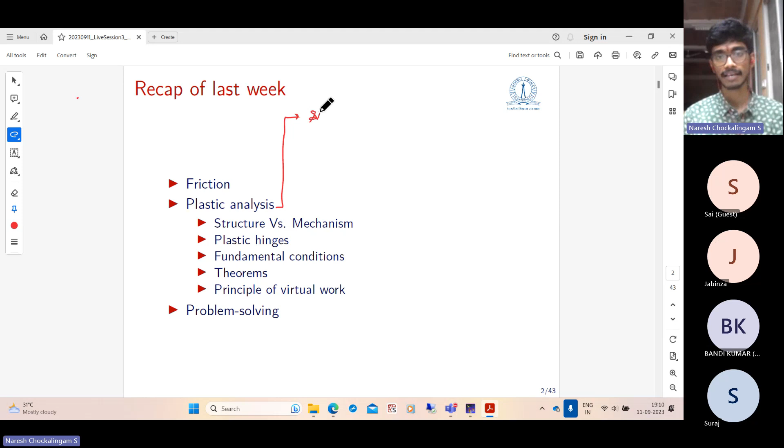Then we looked at plastic analysis of structures. What is the need for plastic analysis of structures? We saw that there is always reserve strength beyond the yield limit. Structures have strength beyond yield after yielding, and this also simplifies the analysis of indeterminate structures. There are various concepts involved in plastic analysis.

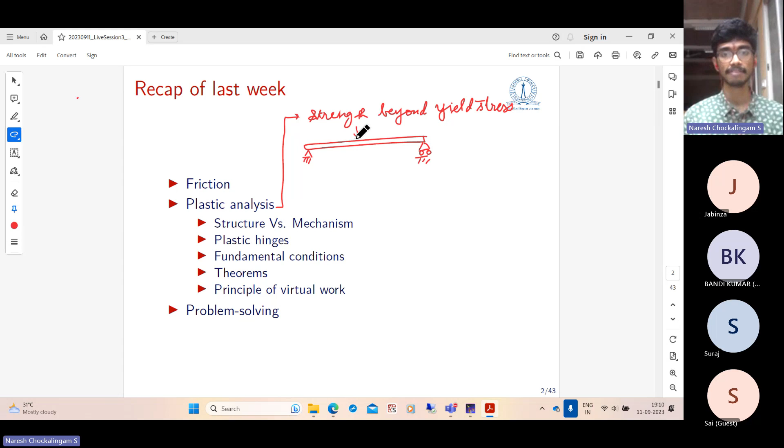We saw that if we take a beam, subject it to some loading—let's assume a mid-span concentrated force—and keep increasing the load P from 0 to a certain limit until the beam collapses, then as the load is increased, initially there is a linear elastic response. Suppose this beam has a rectangular cross section. At a certain load, let us call it P yield, Py.

At this load, the force is so high that while the stress in the cross section remains linear, the extreme fibers have reached the yield stress of the material. Beyond that point, the load can further be increased, but the stress in the extreme fibers cannot exceed Fy. So the fibers next to them start reaching the stress Fy, and the stress distribution in the beam cross section is no longer linear.

You get a bilinear stress distribution: up to a certain limit, part of the section has yielded and the remaining part remains linearly elastic. At this stage, the stiffness of the beam comes only from the linear elastic portion, since the yielded fibers have no stiffness. The material curve of an elastic, perfectly plastic material shows a linear elastic response followed by a perfectly plastic response, where stiffness is zero. So these regions of the beam do not contribute to elastic stiffness, and the stiffness of the beam is reduced significantly, making the curve nonlinear.

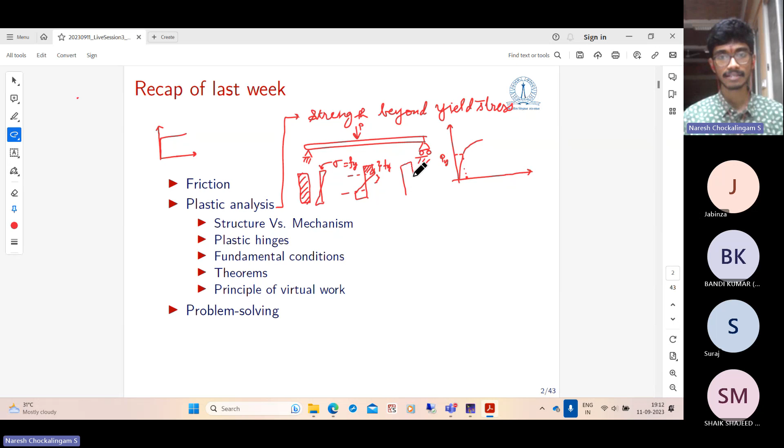As the load is increased further, the plastically strained region increases until it reaches the neutral axis. At this point, the entire cross section is plastic—no longer elastic—and the cross section is completely yielded, with no stiffness. Therefore, the beam collapses.

For this simply supported beam, the load at which the middle cross section becomes completely plastic is called the plastic collapse load, because once fully plastic, it supports a moment given by a constant stress above and below the neutral axis. If you take an infinitesimal element and integrate the force due to this, multiplied by the distance, you get some moment.

The moment at which this happens is called the plastic moment capacity of the beam, MP. Once the plastic moment capacity of the beam has been reached, it has got no more stiffness, so it forms what is called a plastic hinge. It is free to rotate, but at a constant moment of MP.

We have seen this in the last week. If you haven't attended, you can go look at the YouTube link of the previous lectures. So this is the mechanism by which a beam collapses.

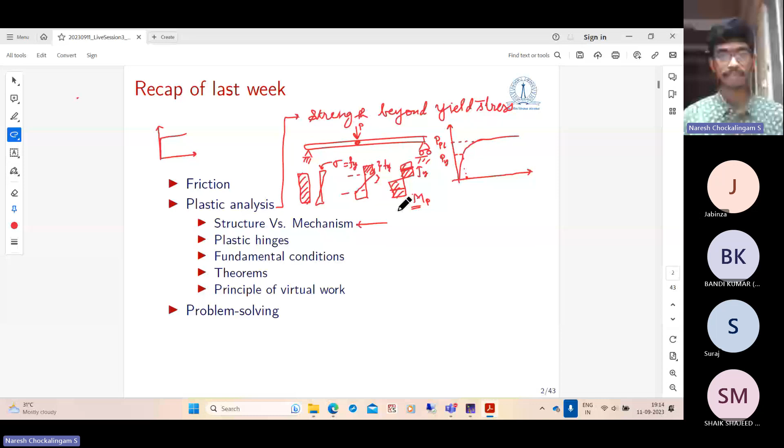We saw that if we have a truss structure like this, subjected to some force, it resists the applied load by generating internal forces arising from the deformation. On the other hand, if you remove the middle member...

And you have something like this, both pin connected, all joints pin connected, and you apply a load like this, it collapses this way. It forms a 4-bar mechanism. Here the members don't deform, they don't generate any internal forces. They accelerate, they just rigidly rotate and translate, and they cannot take any load.

So at the verge of collapse, what happens is there are sufficient number of plastic hinges formed and the structure becomes a mechanism, or is close to becoming one. So a structure cannot take any further increase in the applied load. That is the point we call the collapse load.

So we have seen what plastic hinges are, and we saw what are the 3 fundamental conditions that need to be satisfied by a structure at the point of collapse. When a structure is at the verge of collapse, the first condition is it becomes a mechanism.

There are sufficiently many plastic hinges formed such that it becomes a mechanism. The second condition is it is still in equilibrium with the applied loads, so the internal forces in the structure are in equilibrium with the applied external forces and the reactions.

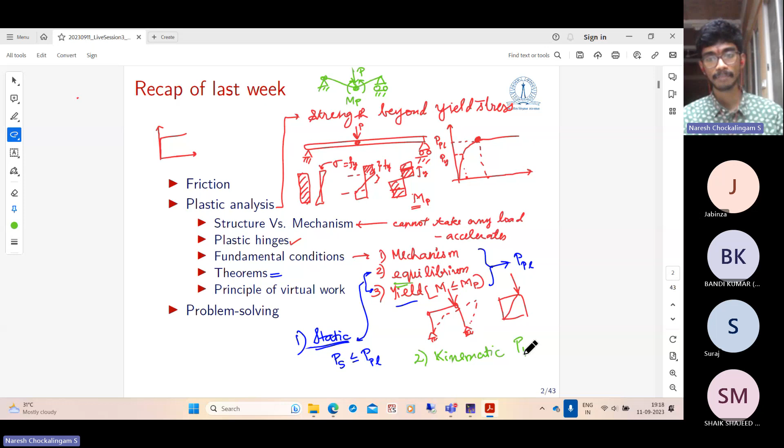Once it has formed a mechanism, the moment in the plastic hinge is equal to MP. So we assume such a mechanism has already formed and enforce equilibrium to determine the force at which the mechanism forms. That gives an estimate of the plastic collapse load called P kinematic, and P kinematic is always an upper bound to the true plastic collapse load PPL.

The third one is if all three conditions are satisfied. In the first case we satisfy conditions 2 and 3. In the kinematic approach, we satisfy conditions 1 and 2. In the third case we satisfy all three. So satisfying 1 and 2 gives an upper bound, satisfying 2 and 3 gives a lower bound, and satisfying all three gives exactly the plastic collapse load.

And for solving problems we saw the concept of the principle of virtual work. Don't worry too much about this. Problem solving is actually easy in plastic analysis. The concepts are a bit involved, but don't worry about the theorems — it will be very easy while we solve problems.

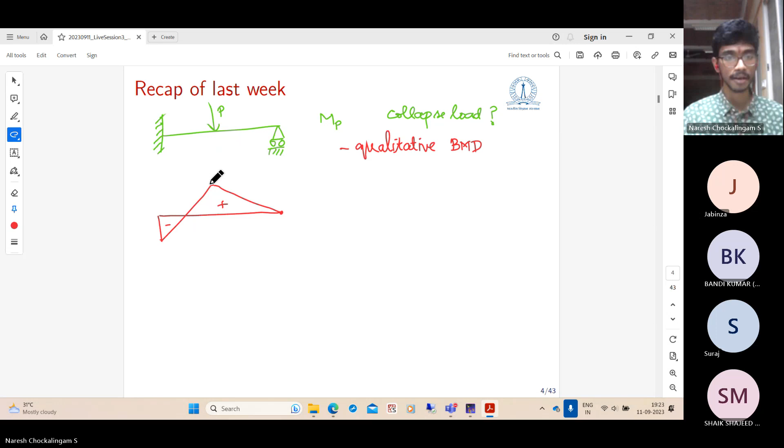We don't know whether this value is higher or this value is higher, or what those values are, but we know a maximum bending moment can either occur here or here. So we have drawn the qualitative bending moment diagram - that is the first step, to draw the qualitative bending moment diagram, which we have done.

The second step is to mark plastic hinges at the absolute maximum of the bending moment diagram. As I said, the moment is always highest here or here in the elastic range. So as we increase the load, the maximum stresses will be reached at this section or this section, and once the stresses increase so much that the entire cross section becomes plastic, it forms a plastic hinge. So it is most likely to form plastic hinges either here or here.

So these are the two locations. Why not anywhere else? Because if it had to form a plastic hinge anywhere else, it should have already formed a plastic hinge here, since the stresses are higher here than anywhere else in the beam. So the stresses are higher in these two locations compared to anywhere else in the beam.

So the first plastic hinge will be formed here, and once it forms a mechanism, it cannot increase the stress beyond that point. So once it forms a mechanism, the structure will just collapse. That is the idea - once plastic hinges are formed such that it forms a mechanism, the stress cannot increase any further in the structure because it has started accelerating and will not generate any internal force.

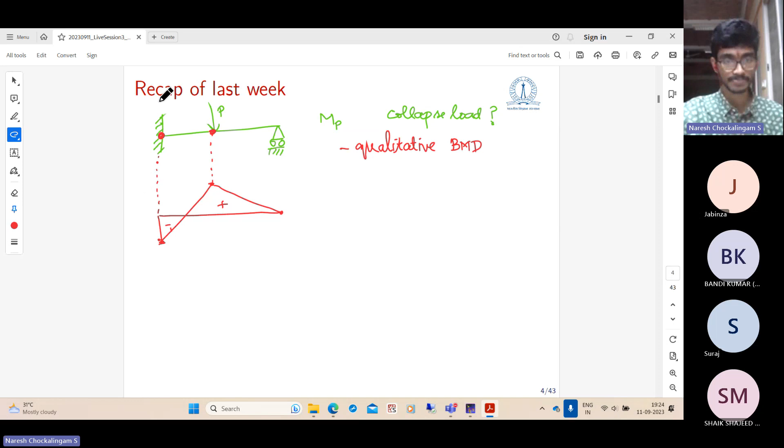So the second step is also done - mark the plastic hinges at the absolute maxima. Now, how many mechanisms are possible? If you have attended the last class, you will know that the number of mechanisms - suppose n is the number of possible mechanisms.

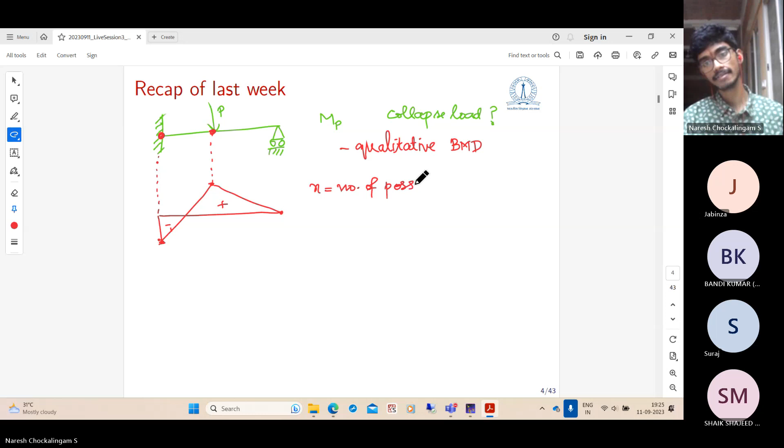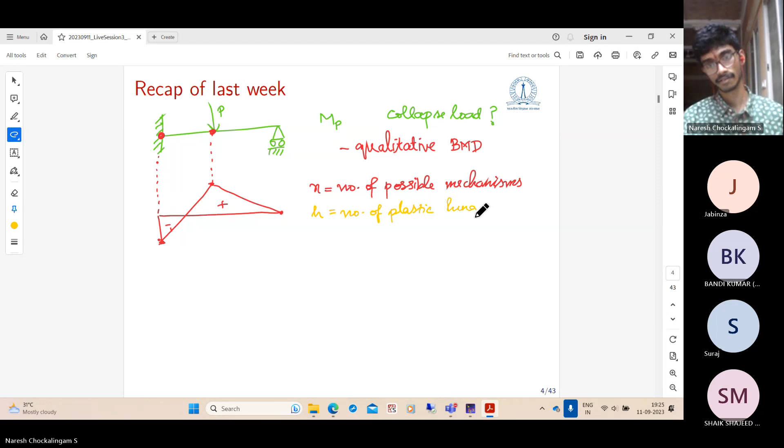It is related to the number of plastic hinges, suppose H is the number of plastic hinges, or actually the number of independent mechanisms. I'll say why it is important. And suppose S is the degree of static indeterminacy. Then these three are related by the formula.

Why is that so? For example, it is easy to see in this example, for this to form a mechanism, you need only one plastic hinge to be formed. The mechanism is like this: once this section becomes fully yielded, it cannot resist any moment and it forms a plastic hinge like this. It cannot take any force.

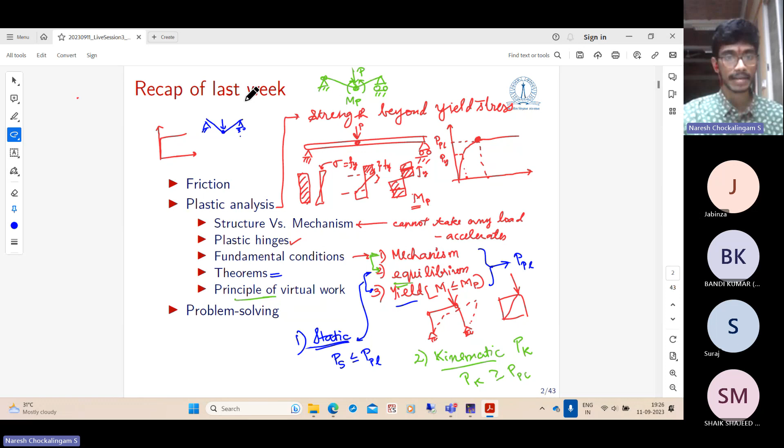But here, is it enough to form a plastic hinge in the middle? No, because even if it forms a plastic hinge in the middle, it is not going to accelerate. This is still attached, so this will flex as a cantilever beam and carry some load. So this is not enough - this is still a statically determinate structure. So one more internal hinge has to be introduced to make it a mechanism. If that hinge happens anywhere here, then it forms a mechanism.

So you know that the statically determinate member has exactly the number of forces which are needed to keep it stable. And if you remove one of the member forces, then it becomes unstable. That is exactly what we want - we want it to become a mechanism. So the number of mechanisms possible is the number of hinges required minus the static indeterminacy. Or the number of hinges required is nothing but the number of mechanisms plus the static indeterminacy. So the number of independent mechanisms is H minus S.

In this case, what is the mechanism? We have identified two plastic hinges. So at the verge of collapse, the structure will go to some shape like this.

And once it forms a mechanism, what is the moment at these plastic hinges? It is the moment capacity. Here we have a hogging moment, so I'm marking it in the same direction - it is MP. Here we have a sagging moment, so I'm marking it in this direction, which is also MP.

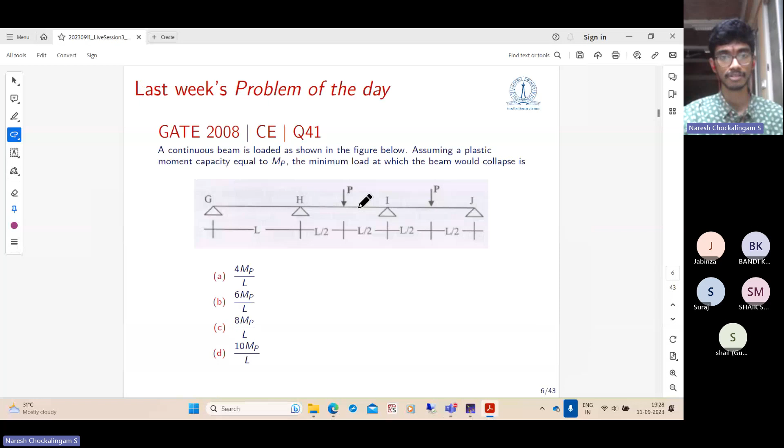For this, how do we obtain this - how do we obtain the plastic collapse load, the relationship between the load at collapse and the plastic moment capacity? We have two methods: one is the principle of virtual work, which we discussed last time, or the equilibrium of parts. I didn't discuss this last time because the principle of virtual work is much easier and takes less time than equilibrium of parts.

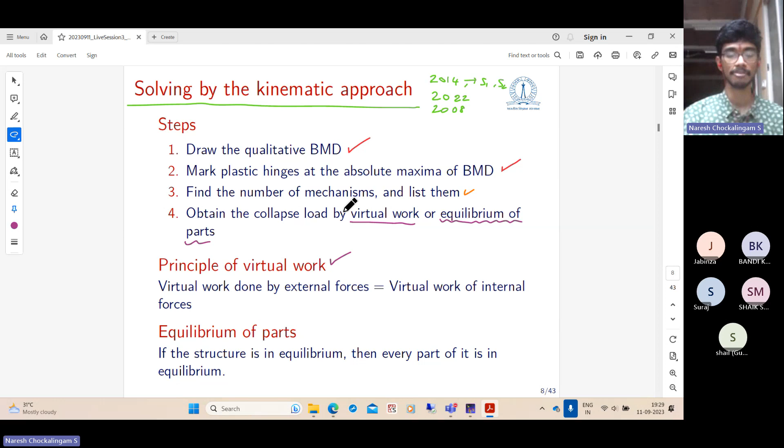So for this problem, this is the deformed shape. At the verge of collapse, this is how the structure will look like. And what does the principle of virtual work state? It states that the work done by the internal forces is equal to the work done by the external forces in moving through any admissible virtual displacement.

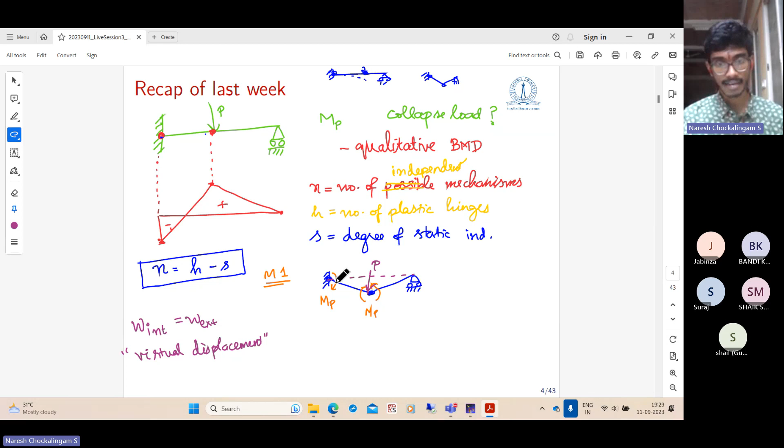So in this case, this is the structure at the verge of collapse. Suppose this beam has rotated by some theta at mid-span. So this is an isosceles triangle, so this will also be theta. And using the exterior angle theorem, this will be theta plus theta - so this will be 2 theta.

Now, if you see the external work done, suppose the midspan comes down by a distance delta. What is the work done by the external force P? It is P into delta. And in this case, delta is equal to theta times L by 2. So it is P theta L by 2.

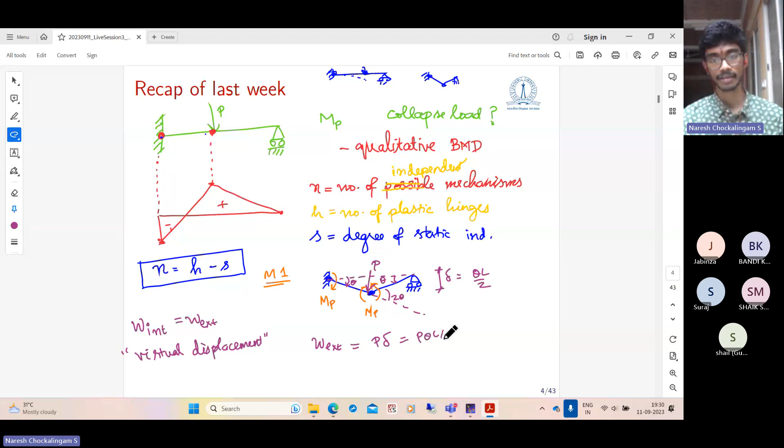And what is the internal work done? Internal work done is: you have an internal moment MP which is rotating this beam through an angle theta, so that is MP into theta, plus here you have a moment MP which is rotating this segment of the beam.

Suppose there had been no plastic hinge, this beam segment would have been straight. The straight beam had to rotate by 2 theta to make it to the current shape. So if the plastic hinge has formed and the structure is collapsing, and it rotates this way, this end by theta, and the midspan comes down by delta, then this segment of the beam has undergone a rotation of 2 theta.

So this plastic hinge has done work equal to MP times 2 theta, which is nothing but 3 MP theta. Equating both, you get P is equal to 6 MP by L. So this was the problem that we solved in the last session.

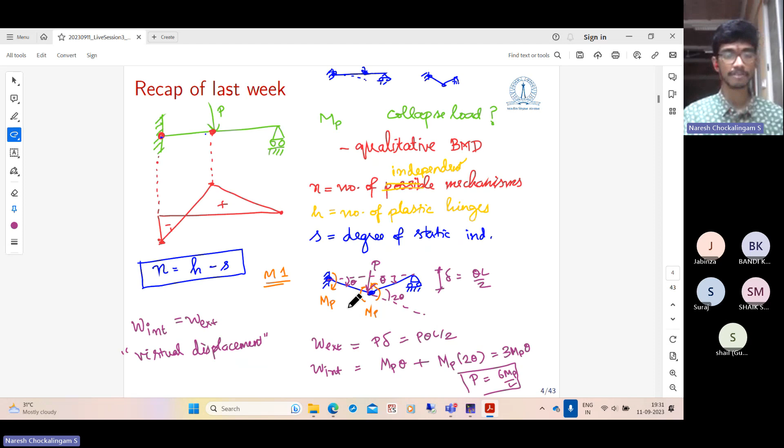So this is using the principle of virtual work, but instead you can also use the equilibrium of parts. I'll demonstrate it in today's problem. This is a problem that appeared in GATE 2014 second set.

In this case, we have an overhanging beam of one span L and the other span L by 3. On this span, there is a midspan concentrated force of magnitude P. Here you have an end span concentrated force of magnitude P by 2.

Let us go step by step. What is the qualitative bending moment diagram of this? At this end, you will have zero moment because it is a free end.

Right above the intermediate support, you will have a hogging moment because this force is acting downwards. So you'll have a hogging moment right here. And right below this, there will be an upward reaction. Right below the concentrated force, you'll have a sagging moment. And this end is hinged, so you will have zero moment there. So this is the qualitative bending moment diagram of this beam.

So the plastic hinge on this beam can either happen here or here. It cannot happen anywhere else, because before that, the structure would have collapsed. So plastic hinge can form here or here.

Let us draw the deformed shape at the verge of collapse. The structure will look something like this. So before that, let me put only the supports.

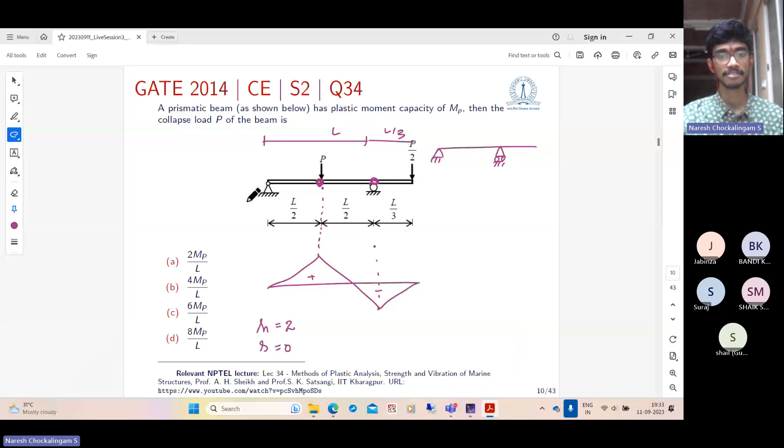Now, how many plastic hinges are there? There are two possible locations of plastic hinges. What is the degree of static indeterminacy of the structure? It is statically determinate, right? So the static indeterminacy of the structure is 0.

You can see because you have three equilibrium equations and you have three unknown reactions, 1, 2, and 3. So it's statically determinate, meaning the static indeterminacy is 0.

And what is the number of mechanisms possible? It is H minus S. There are two possible mechanisms. In one case, the plastic hinge is formed here, and in the other case, the plastic hinge can be formed here. So this is mechanism 1, and this is mechanism 2.

So how does the beam deform in mechanism 1? This portion remains straight, and this is how it deforms. In mechanism 2, this is how it deforms. Let me indicate the applied forces: here we have an applied force of magnitude P, and here P by 2. Same in this case too, P and P by 2.

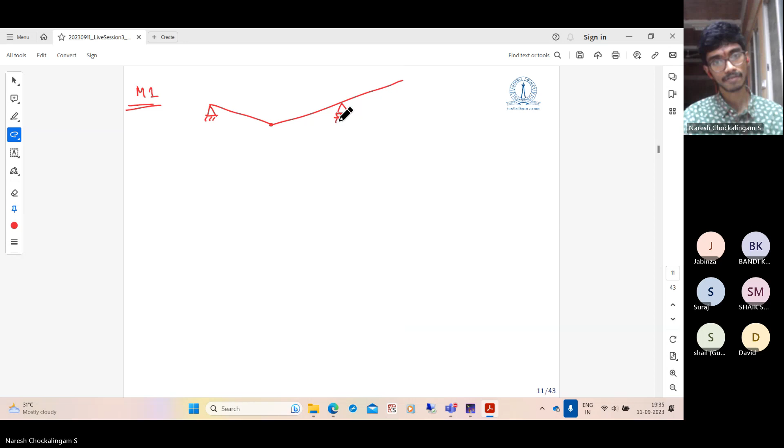Now let us analyze mechanism 1. So in mechanism 1, we have something like this: this is L by 2, this is L by 2, and this is L by 3. And the applied forces are P and P by 2, and this is the only hinge.

Suppose the rotation here is theta. What is the rotation here? It's an isosceles triangle, so this is also theta. What is the rotation of the beam segment here? By the exterior angle theorem, this is 2 theta. What is the rotation here? These are opposite angles of intersecting lines, so this is also theta.

And suppose this is delta. The midspan deflection of this is delta 1. Let this be delta 2.

Let us write down the work done by the external forces. The work done by external forces is P moving through delta 1 plus P by 2 moving through delta 2, but these two are in opposite directions. The load acts downwards and the displacement is upwards, so the work done is negative: minus P by 2 times delta 2.

What is delta 1 from the geometry? Delta 1 is L by 2 times theta. And delta 2, this angle is theta and this length is L by 3, so delta 2 is L by 3 times theta. So the external work done is PL theta by 2 minus P by 6 L theta.

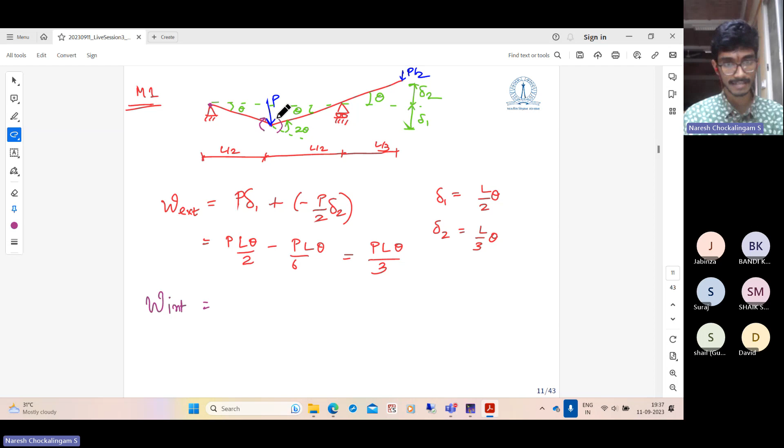Note that the beam has rotated in the direction of MP, so the work done is MP times 2 theta. Equating both, we get MP into 2 theta is equal to PL by 3 into theta.

So this should hold for arbitrary theta. That is what the theorem of principle of virtual work states - it should hold for arbitrary kinematically admissible virtual displacements. Kinematically admissible means we respect the support conditions: the assumed displacement obeys the support conditions, we ensure displacements are zero at the supports and rotations are allowed. So this theta is admissible, and this should hold for theta not equal to 0, which means the collapse load is 6 MP by L.

For this mechanism, we also have another mechanism and we need to look at it also. So which is the actual collapse load? We'll come to it. So in case the middle one, in case the plastic hinge is formed here, it will collapse at a load of 6 MP by L.

Alternatively, if the plastic hinge had formed here, we'll see at what load it will collapse. So this is mechanism 2. You have the beam like this. This portion remains straight and there's a plastic hinge formed here, so this will support a moment of MP and this has rotated by theta. And we have the applied force P by 2 here.

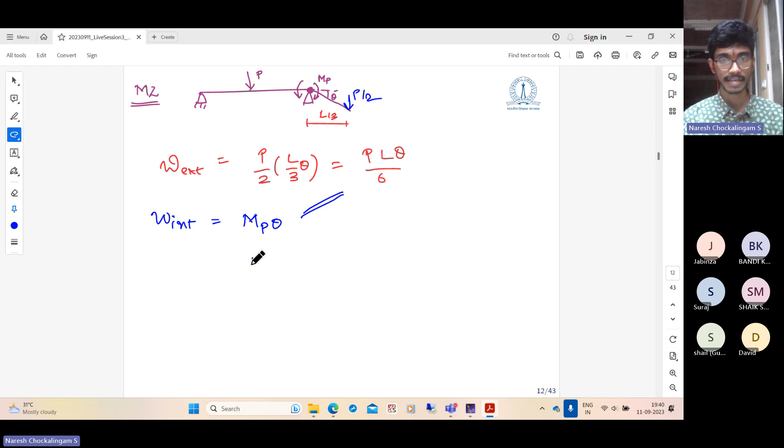And what is the work done in the plastic hinge? This plastic hinge has a moment MP, which is making it rotate by theta. So the work done by that is MP into theta. Equating these two, we get P is equal to 6 MP by L again.

So in this problem, we got both of them to be equal. But suppose you get P1 and P2, the actual collapse is the minimum of P1 and P2. So in this problem, this is P2, P corresponding to mechanism 2, and this is P corresponding to mechanism 1. In this problem, both turned out to be equal, but if they are not equal, you need to take the minimum of the two. Why? Because the kinematic approach gives an upper bound - it says which is higher.

The collapse load we get is an upper estimate. It means that you have two estimates for the collapse load, one of them is above and one of them is close to it. So as we increase the load, the collapse would have already occurred at the lower estimate, so it cannot go to the higher estimate. So out of the two, you need to select the smaller one. In this problem, it is 6 MP by L, which is option C.

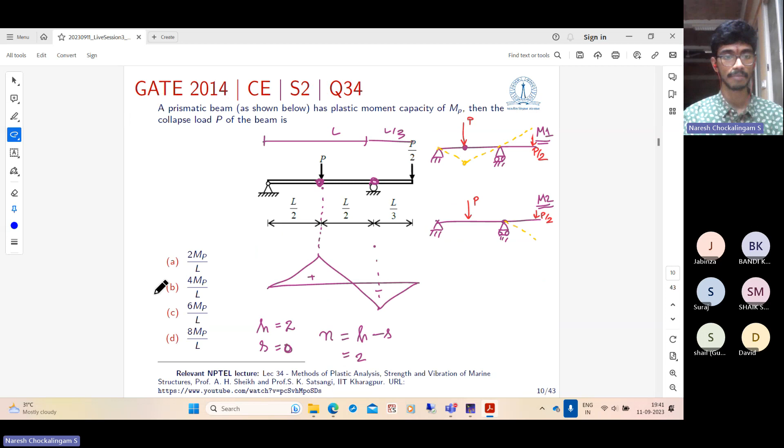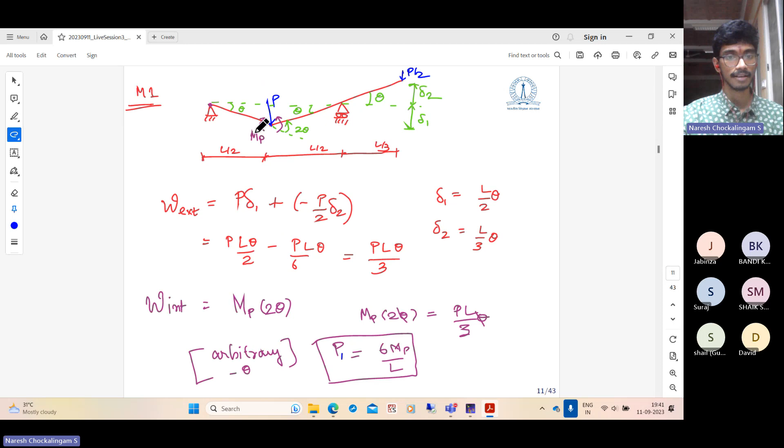As I said, you can also approach this problem by equilibrium of parts. Let me show it for in this case. Okay, so, or rather, we can also take it later.

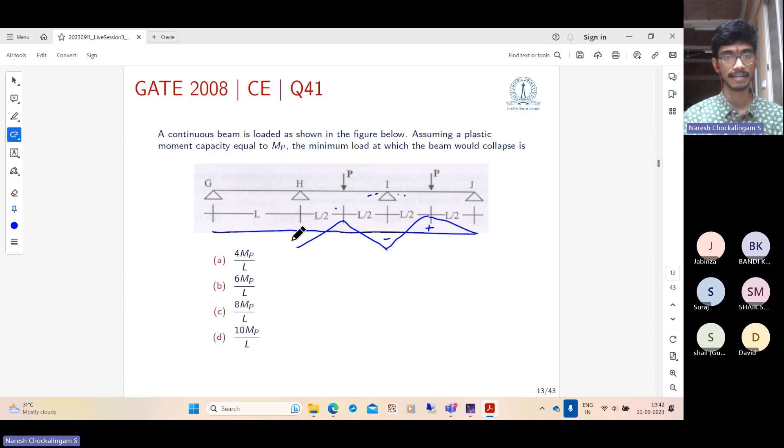So this is the qualitative bending moment diagram for this beam. As I said, we don't know these magnitudes, but we know if a plastic hinge is formed, the possible locations are here, corresponding to this peak, or here, or here, or it can also be here. So the number of possible plastic hinges in this problem is 4.

And what is the degree of static indeterminacy for this problem? Could anybody tell? Yes, it is simple, right? It is just a 3-span continuous beam.

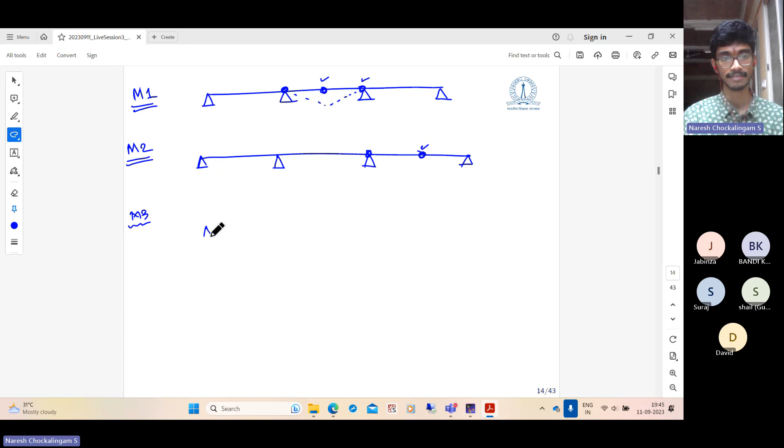So suppose you say M3 exists and you draw a mechanism like this, this is not an independent mechanism, right? Because it will again give rise to the same result. Because this beam is supported sufficiently, this is stable. Under an applied force, this cannot go down. This cannot freely rotate. So it again corresponds to this mechanism only. Therefore, it is not an independent mechanism.

That is why I said the formula n equal to h minus r gives the number of possible independent mechanisms. As you can see, the one that I have drawn as M3 and M2 will give exactly the same internal virtual work and the external virtual work. So that is useless. These 2 are the useful mechanisms. We'll analyze only these 2.

Okay, so let us draw the deformed shape when the structure is about to collapse. How does it deform in the first case? In mechanism 1, the structure will deform like this. Let us displace this point, and there is an applied force of P and P here in both cases. So there's a plastic hinge here, here, and here, and there are supports here.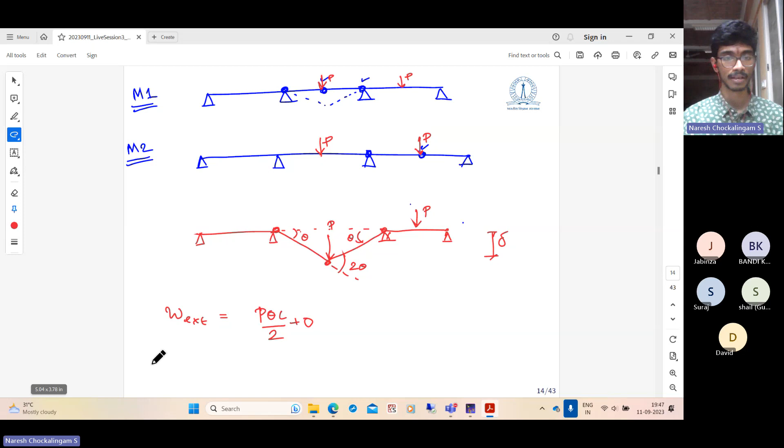And what is the work done by the internal forces? If you mark the internal forces, there has been a plastic hinge formation here, so this is under a hogging moment of magnitude MP. Here there's a plastic hinge, so this is under a sagging moment of magnitude MP. Here there's a hogging moment of magnitude MP. So the internal virtual work is MP times theta, plus this MP has rotated the beam by 2 theta, and this MP has rotated the beam by theta. So the total work done is 4 MP theta.

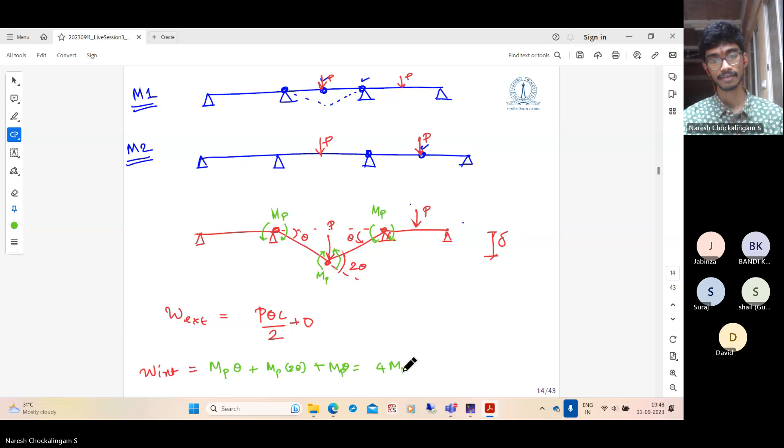What is the next step? Equate the two. If you equate the two, you get an estimate of the collapse load as 8 MP by L. Is that the answer? No, because we have seen only one of the mechanisms. Let us call it the collapse load obtained by mechanism 1, PC1.

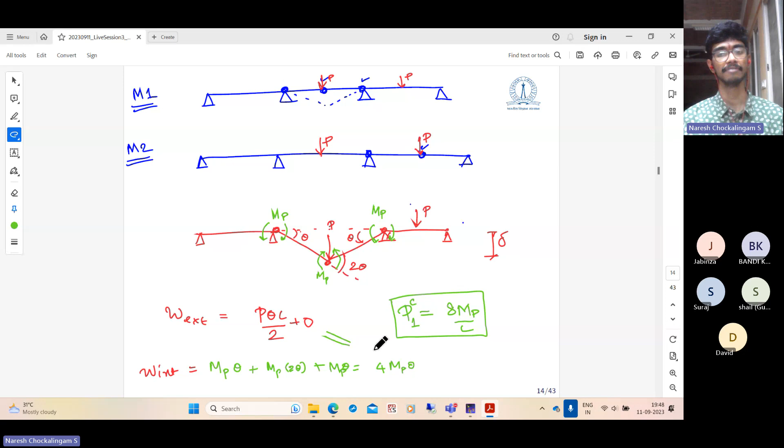Let us look at the next mechanism now. What is the next mechanism? We have, this is how is it?

There's a plastic hinge formed here, and there's a plastic hinge formed here. This is already a hinge. So, subjected to these applied forces, this goes down like this. This cannot go down because it is supported here. This can only deform like this.

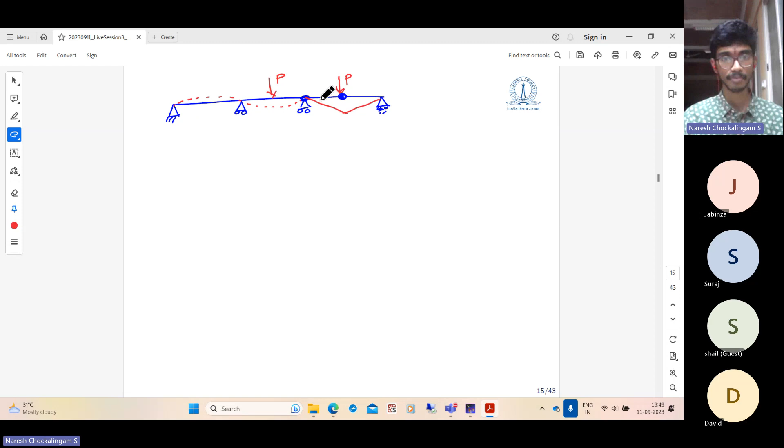And that deformation is elastic, which is much smaller compared to the plastic deformation. So suppose this is the virtual displacement we are considering. This rotates by theta, this rotates by theta. And what about this angle? As in all other cases, this is 2 theta.

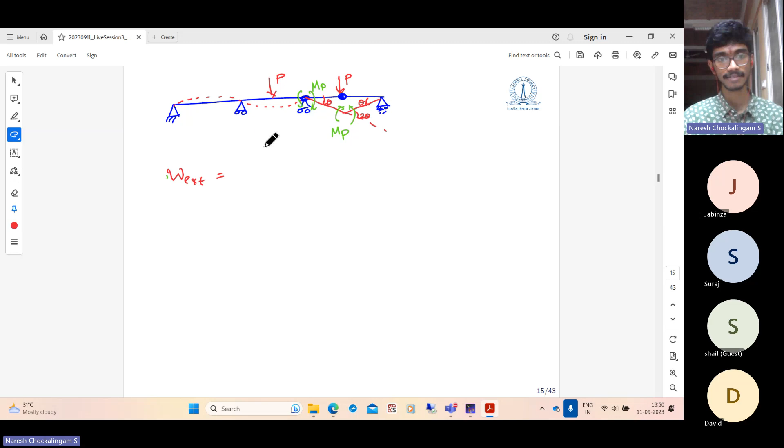So if a plastic hinge has formed here, we know there will be a resisting hogging moment MP here. Here there is no moment because it is already a hinged end, and here there will be a sagging moment of magnitude MP. So what is the external virtual work done? This doesn't do any work because there is no plastic displacement here, and this does the work of P times delta, which is P theta L by 2. Delta is nothing but theta multiplied by L by 2.

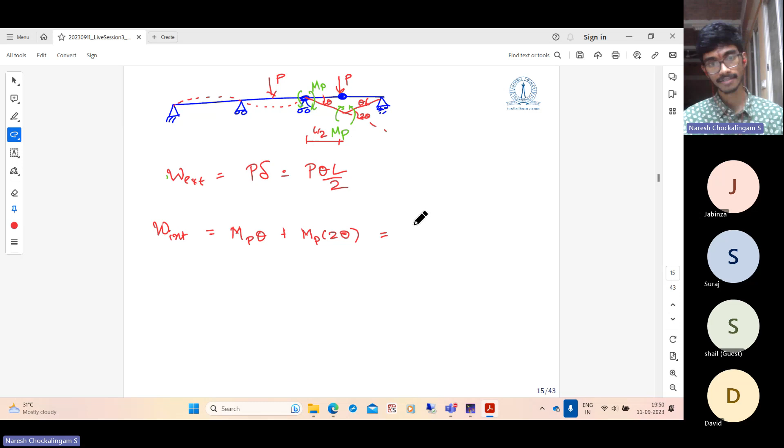And what is the internal virtual work? So for this plastic hinge, the rotation results in work done by this force MP on theta. And the rotation of this other plastic hinge results in a work done by this force MP on 2 theta. So this is 3 MP times theta. And the external virtual work done is P theta L by 2. Equating these two, theta gets cancelled as in other cases, and we get the collapse load of this beam subjected to mechanism 2.

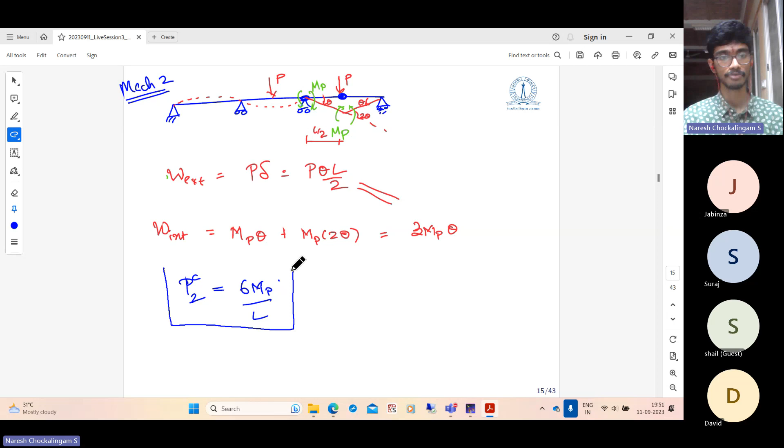So this is mechanism 2, right? It is given by 6 MP by L. Equating the two above, so this is how we solve it.

Now you see that there are two different magnitudes we got. So if we assume collapse mechanism 1, we get a collapse load of 8 MP by L. And if we assume collapse mechanism 2, we get a collapse load of 6 MP by L. Now which of these should we consider? We should take the minimum, because the structure would have already collapsed when P2C is reached, since P2C is smaller than P1C. So it makes no sense to increase the load beyond P2C. Therefore, the collapse load of this structure is the minimum of 6 MP by L and 8 MP by L, which is nothing but 6 MP by L.

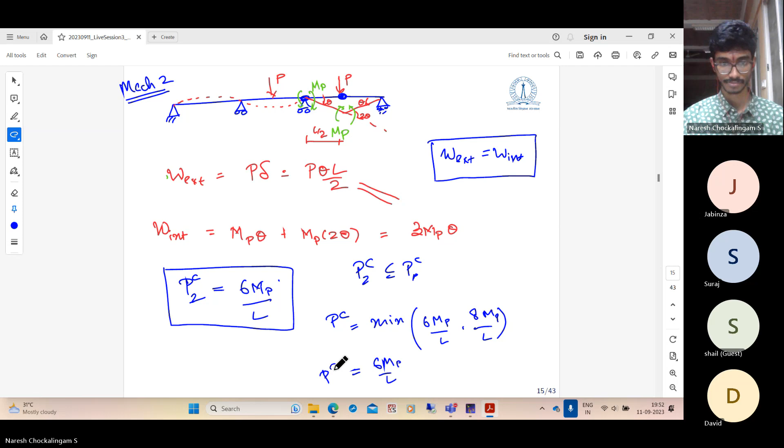So which option does it correspond to? It is option B.

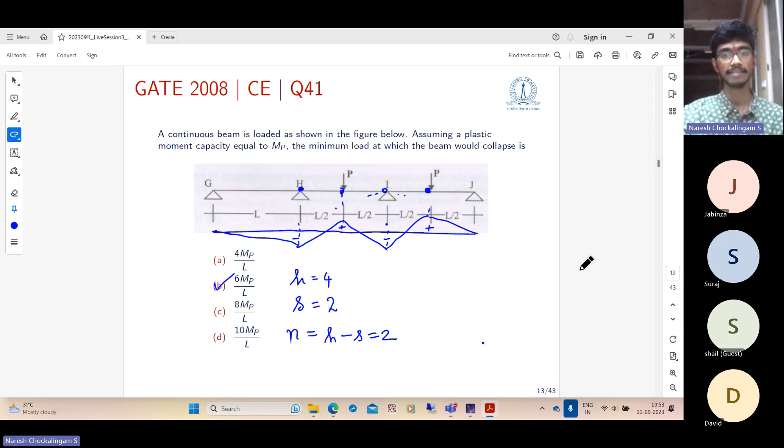So in these problems, in the problem we saw last week, and also in the two problems we solved today, the key thing is MP is given as some value. But how do we actually determine MP? We'll see that in this problem. Given a cross section of the beam and the properties such as the cross-sectional properties and the material, given all these details, how do we actually find out the plastic moment capacity of the section?

So this was from GATE 2022. We are given a diamond shaped section, a square placed diagonally, placed along its diagonal, and the diagonal is the bending axis. The ZZ axis coincides with a diagonal of the square. We are asked to determine the shape factor about this axis and the plastic moment capacity of this beam.

So how do we approach this problem? Any, feel free to put in your ideas. So we are asked to determine the plastic moment capacity of this beam. How do you approach this problem?

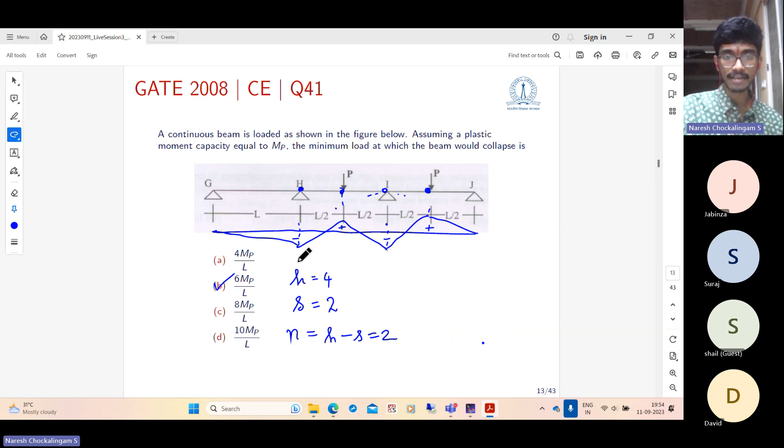So this has got nothing to do with plastic analysis. All that we saw earlier is valid for structures: given a capacity, what load the structure can take. But how do we find the capacity itself? That we are going to see now. So let us start with what happens in a plastic hinge, right? We have a section. Sorry, this is bad.

So you have a section like this. And this is the bending axis. And this is some other axis. This section is symmetric about both.

When a plastic hinge forms, all the fibers in the section have reached the yield stress, so the section is entirely yielded. Above the bending axis we have compression, and below the bending axis we have tension. The magnitude of sigma in both cases is equal to the yield stress. That is when a plastic hinge forms.

So initially there's a linear response. As the load is increased beyond the yield stress, some portion will become plastically yielded. And as the load is increased even further, the entire section becomes yielded. It takes this rectangular shape because the stress cannot exceed the yield stress of the material. So this is the ultimate state of the cross section when a plastic hinge has formed.

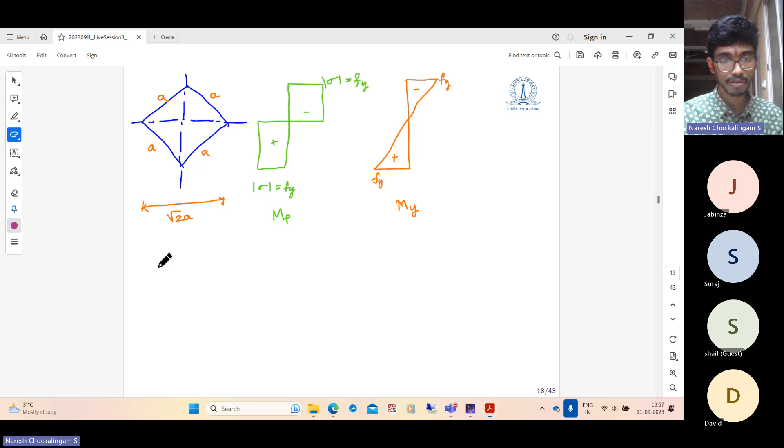So how do we find the moment in the cross section? From the beam theory, it is nothing but integral y df over the entire section. So because of this stress, there will be a compressive force.

If you take a small element of the cross section, over that element you will have a compressive force df. What is df? It is nothing but sigma times dA, the force sigma times dA. And what is dA? It is just dx dy, from basic mathematics.

So sigma, that's y here. Y sigma dx dy. In the case of plastic moment MP, the entire section has yielded, so the limits... you have a double integration going from, let us say,

over this region. This region is S, Y. What is sigma in the case of MP? It has yielded fully everywhere, independent of where the location is. It is Fy. Let me take it as dz dy.

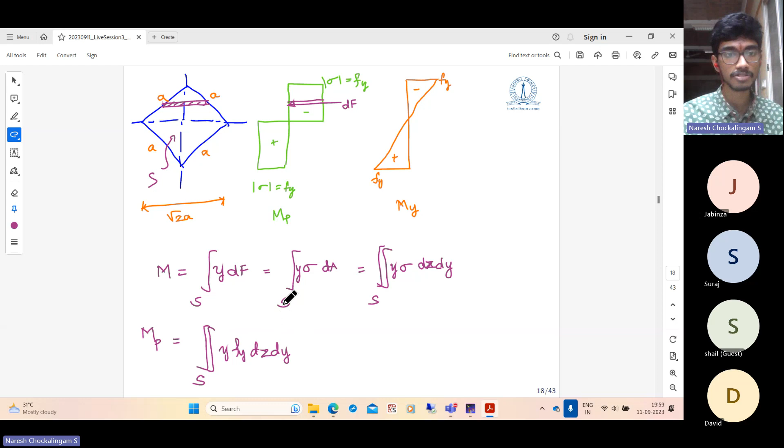Now let us find out the limits of integration. What are the limits of y? Y goes from minus... so this is root 2a, so vertical is root 2a. So this distance is a by root 2. Again by Pythagoras theorem, it goes from minus a by root 2 to a by root 2. These are the limits for y.

And what are the limits for z? Z goes from... suppose at a height y, the strip is of width b of y. So z goes from minus b of y by 2 to b of y by 2. And we have y Fy dz dy.

So let us simplify this further. What is b of y? The width at a height y. This strip is taken at a height y, and at a height y, the width of this section is b of y. What is b of y at? So we know that it is linear.

So b of y equal to 0 is what? It is a by root 2. And b of y equal to a by root 2, what is it? It is 0. Sorry, at y equal to 0, it is not a by root 2, it is root 2a.

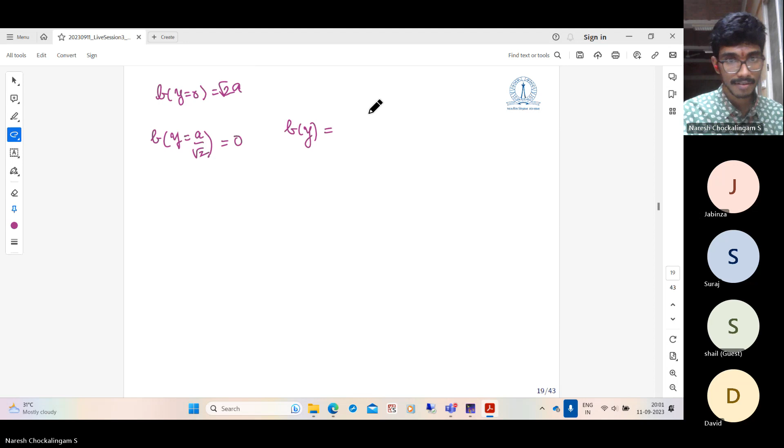And when at the top, when y is equal to a by root 2, it is 0, the width is 0. So what is b of y? It is nothing but root 2a minus 2 times y. Just substitute - it is a linearly varying function. If you substitute y equal to a by root 2, you see this goes to 0. So that is b of y.

So what is b of y by 2? It is a by root 2 minus y.

Okay, so we have everything. We just have to evaluate this integral to find the plastic moment capacity.

MP is the integral, y goes from minus a by root 2 to a by root 2, z goes from minus b of y by 2 to plus b of y by 2. What is minus b of y by 2? It is minus of a by root 2 minus y, to plus a by root 2 minus y. And the integrand is y times fy dz dy. Note that fy is a constant, and this is a function of y only.

So you can directly substitute the limits for z, from minus a by root 2 to a by root 2. If you integrate z directly, you get the upper limit minus the lower limit, which is a by root 2 minus y, minus of minus a by root 2 minus y. So it becomes 2y fy times a by root 2 minus y dy.

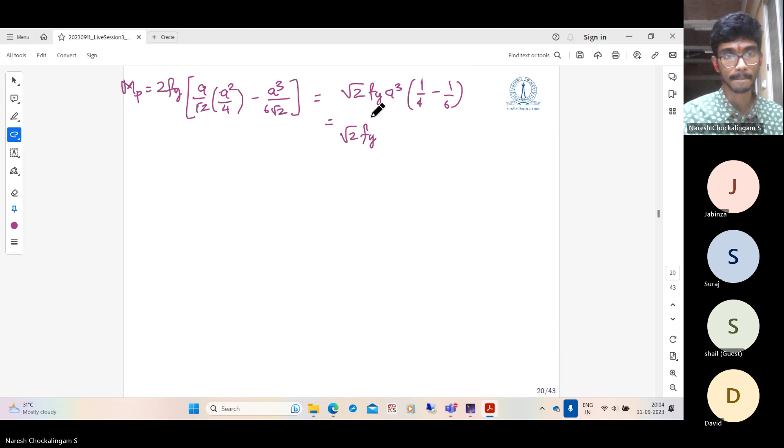Taking things commonly out, you get root 2 fy a cube into 1 by 4 minus 1 by 6. Sorry, you need to subtract again, there's another minus term contributing here. Let me go back.

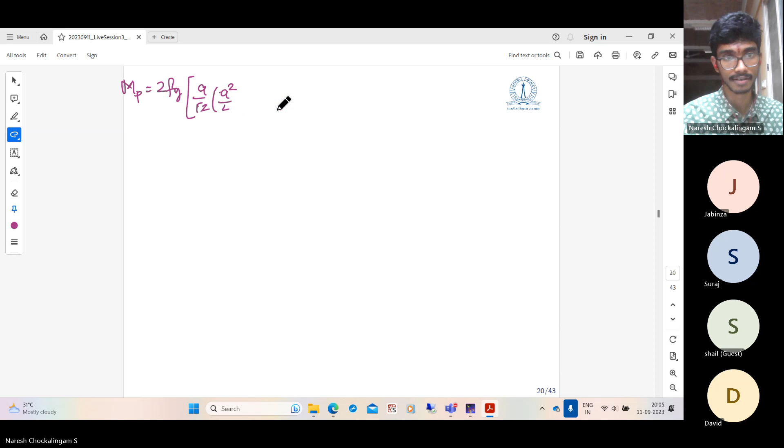This function is valid only in the upper half. For the lower half, it is exactly symmetric about this line. So instead of integrating from minus a by root 2 to a by root 2, I can replace it as 2 times the integral, just to avoid substituting the lower limits. Because these two halves are identical about the center line, you can integrate from here to here and add it to the moment generated by the other half. Both are in the same direction, so you can add them up.

Otherwise, what you have to do is find b of y by 2, another function in the lower half, and then split the integral into two and add them up. But since the contribution from the lower half is the same as the upper half, in all such cases you can make the lower limit 0 and multiply by 2.

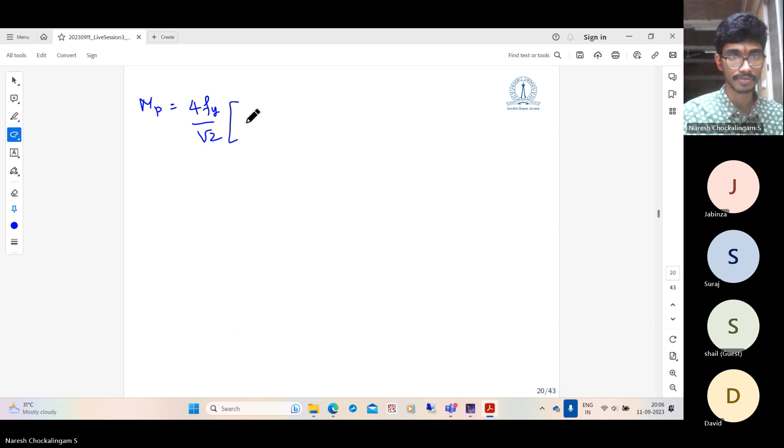So you have 2 times the integral from 0, and this becomes 4 times from 0. So we get MP equals 4 times fy by root 2, times a cube by 4 minus a cube by 6, which is equal to 4 fy by root 2 times a cube by 12.

Now evaluate what this is: 4 into 250 MPa, so 250 into 10 power 6, into a cube where a is given as 100 mm, so 0.1 meter, all divided by root 2 into 12. Evaluating this, you get 4 into 250 into 10 power 6 into 0.1 the whole cube, divided by root 2 into 12. The answer we get is 58.92 kilonewton meters. So we have got MP.

Is there any doubt? Is it clear? You can unmute and talk, no problem. Okay, thank you.

So we have got MP, we know option B is wrong and option D is wrong. We got MP as 58.9 kilonewton meters. The next step is to determine the shape factor.

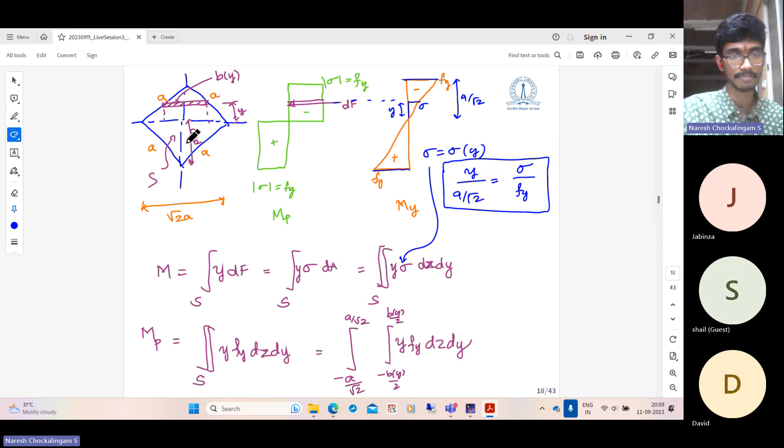Let us multiply by 2 because this is a line of symmetry. The contribution from top will be the same as that from the bottom. What are the limits for y? Y goes from minus to plus, but we have multiplied by 2, so it is 0 to a by root 2. What are the limits for z? Z goes from minus of a by root 2 minus y to a by root 2 minus y. And what is the moment?

Y multiplied by sigma. But what is sigma? Sigma is Fy into y by a by root 2, multiplied by dz dy. Again, nothing else is a function of z. All these are independent of z. So you can directly substitute the limits for z.

So you get 4 Fy integral from 0 to a by root 2. I'm taking this minus, this is 2 times this, so I'm taking the 2 outside. So I get y square, that's a y here, it's a y here, into a by root 2 minus y, dy. Just evaluate this integral, you get 4 Fy.

This one is a by root 2, y cube by 3 minus y power 4 by 4, evaluated from 0 to a by root 2. So what is the value here? So it is 4 Fy.

I substitute this here, we'll get root 2 cube is 2 root 2. 2 root 2 into 3 is 6 root 2. 6 root 2 into 2 is 12. So we get a cube by 12 minus, so again a by root 2 power 4 is a power 4 by 4, and there's already a 4 in the denominator, you get, so there is an a, so a power 4 by 16.

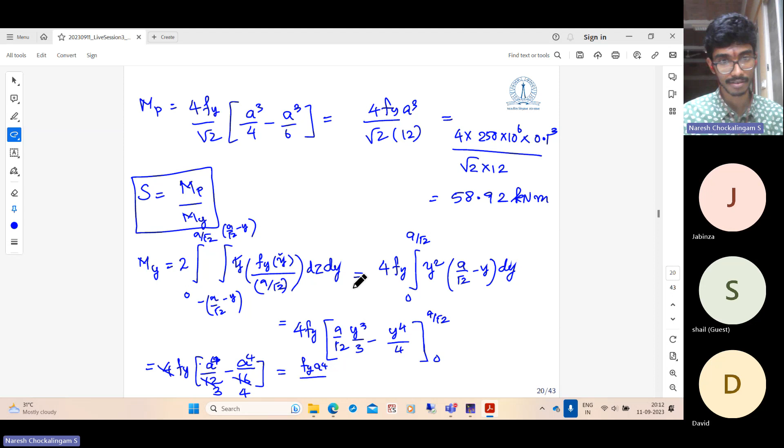So this is a 4, 12, 16. This becomes a 3, this becomes a 4. So it is nothing but Fy by Fy a power 4 by... just a minute, there is this a by root 2 outside. So we have this a by root 2 outside, by 12. So what is the answer?

You get square root of 2 Fy a cube. And what did we get in the previous case? We got 4 times Fy a cube by 12, which is nothing but 2 root 2 times Fy a cube by 12. So comparing, this is MP, this is My.

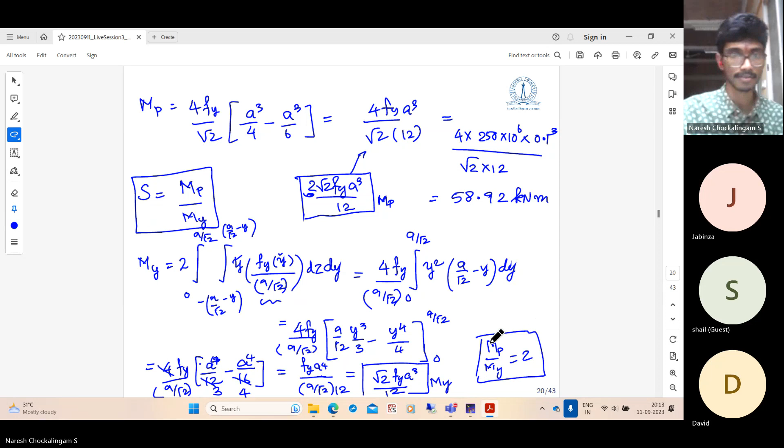You see that MP by My differ just by the factor 2. This 2 is only extra. So MP by My is equal to 2. That is exactly the shape factor. So the shape factor of this beam is 2. So the correct answer is option A.

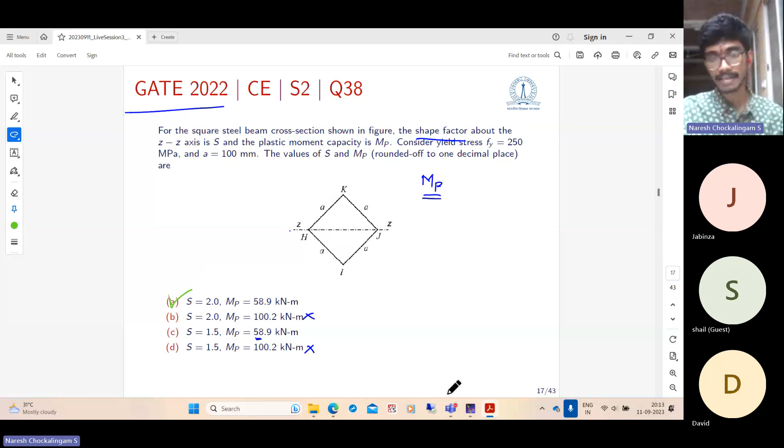So we are past the time. I think we could get into partial differential equations today, but it is too late. We can take it up in the next class.